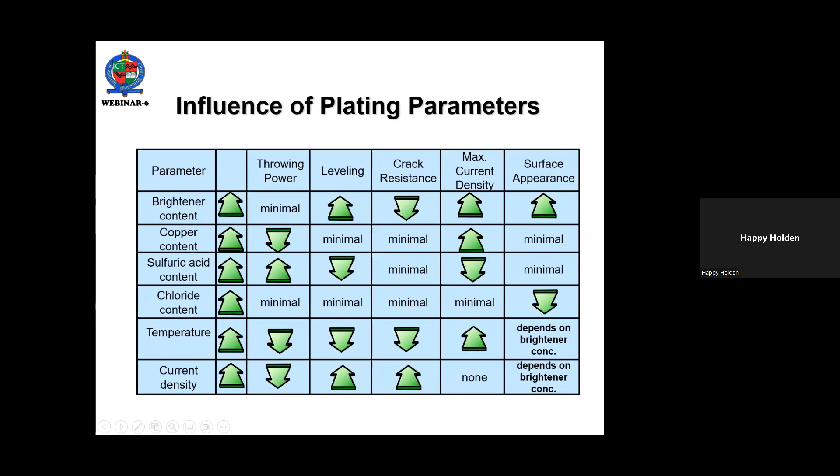When you get into electroplating, which has always been my focus as a chemical engineer, there are a lot of parameters that influence plating and techniques like that. So today we'll talk more about sensors and areas like that I spent a lot of time working on and developing. The impact of these various plating parameters you can see in terms of relative influence. The interesting thing there in terms of most influential, contact resistance is one that a lot of times maintenance and everyone doesn't pay attention to, but resistance can build up on your plating racks, things like that, and have enormous influence. So preventive and predictive maintenance that we talked about is a really important one.

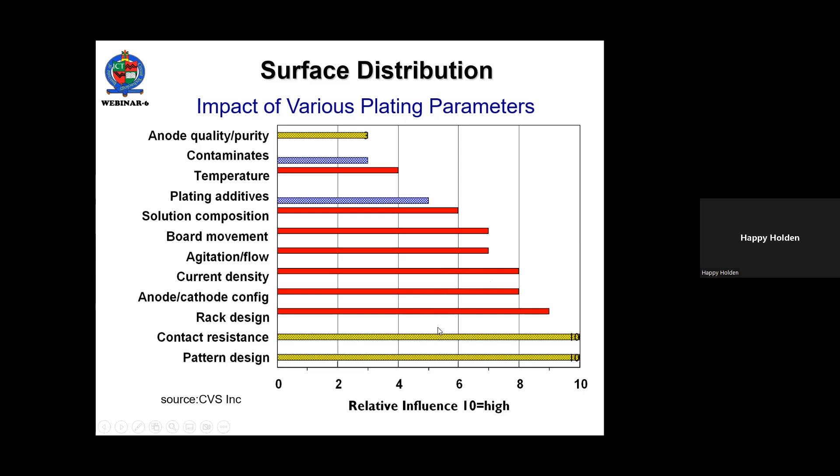But the last one, pattern design, is not one that you control. That's the artwork you're getting from your customers. And so that is one of the most important, and somehow a DFM program to help customers understand do's and don'ts of printed circuit design that'll affect plating parameters is really, really important.

Like I say, the digitization or the smart factory is basically one of sensing, connecting these sensors and data, and then predicting them to have an outcome improvement that you haven't had before. But the sensing is not just the sensing of data and activity, but it could also be interfacing to the automated machines that you purchased that are running their own loops, but you don't have access to some of the information they have. And so tying into smart equipment, again, is part of the programs we're talking about today.

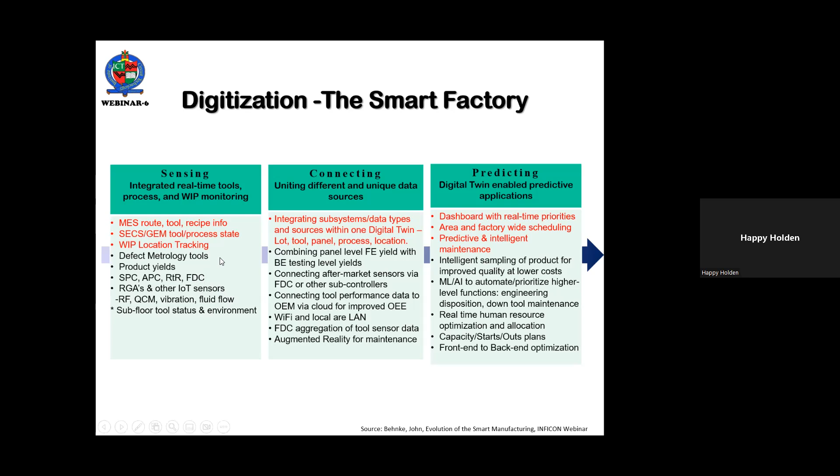The tin nickel is not tin and nickel. It's a unique alloy that's tin and nickel in a chloride bath, non-proprietary. We were only one of two in the entire world that used that. But if you look up the history, you'll find that tin nickel is far superior to nickel as a barrier plate. And over that, we would put our gold flash. So 1/10 of a micron of gold flash over tin nickel outperformed in Bell Lab studies 100 microinches of gold over sulfamate nickel.

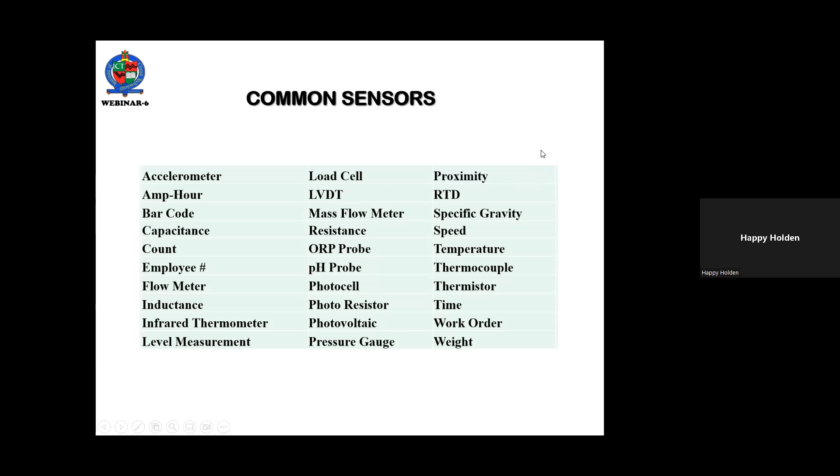The common sensors usable in printed circuit or assembly are listed here. There's probably far more, but ones like mass flow meters, specific gravity, temperature, pH probes, flow meters, inductance, time is an important one, ampere hours, weight, pressure gauge, level. These are all common sensors that potentially could improve and be part of your program.

One of the most important are these non-contact sensors that can read lot code. And these are some of the different ones you see here. Either the DMC code that may be on a carrier, or it could be a drill code that you put in after drilling, or a barcode that you put in as part of the imaging or part of the solder mask and legend type.

But anyway, we talked about the Wheeland facility that has nearly 120 of these readers to automatically direct the process flow because of all the different types of customers, different types of copper thicknesses, different materials, and different products that they build interchangeably within their system.

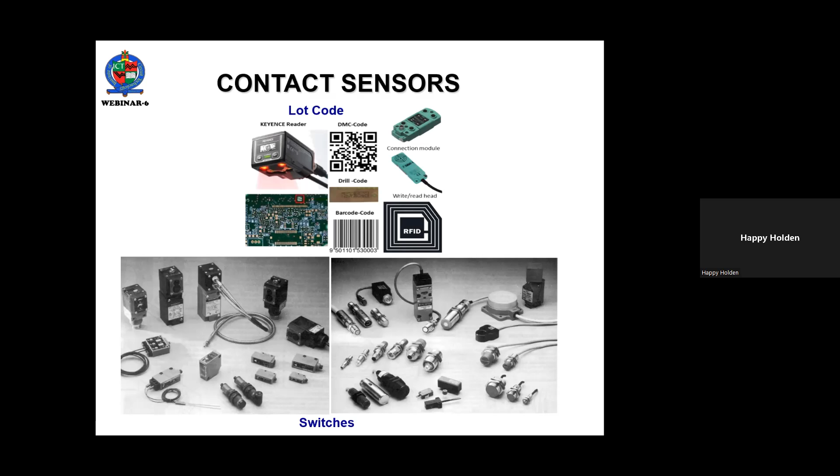Hopefully people will write talks about their etching system that can simultaneously handle 5-micron copper and up to 6-ounce copper on inner layer, outer layer etching in the same machine at the same time. And that's improvement in productivity and quality. You can always ask the question, how is that possible? Well, it is possible, being done 24/7 with the ability to move down to under 5-micron lines and spaces.

Ion selective electrodes are used throughout the world, and you can see from the list here that they cover a lot of elements that are used and are part of printed circuit or assembly and other cleaning processes with their range and techniques like that.

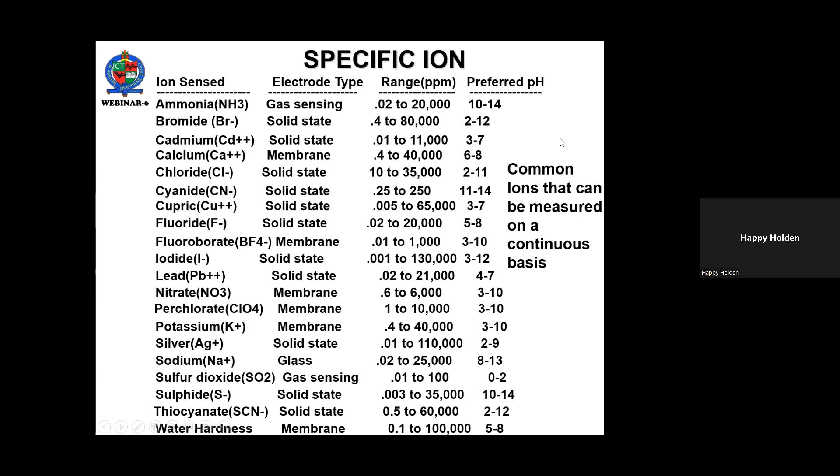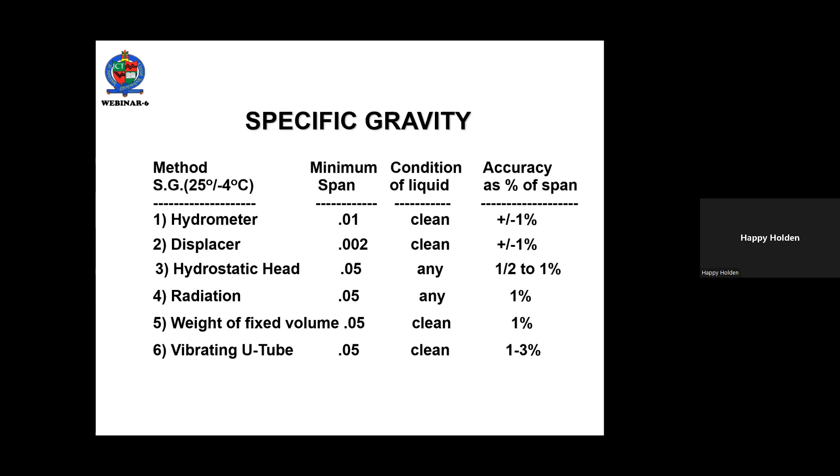My favorite one that is not used as much as it should be is specific gravity. You all have probably worked with the hydrometer, which is an inexpensive, easy to use glass hydrometer. You can buy these in different ranges and essentially drop them into any tank and read out the specific gravity. Another one, the displacer, is typically used in etchant control. Hydrostatic head is one that, rather than a set point, can read out continuously. There's radiation and weight of fixed volumes and the vibrating U-tube.

It's easy to do. Like I said, you just buy these hydrometers inexpensively, drop them into a sample. Any operator can do this. And in fact, this should be part of your specific process control, to have operators routinely measuring critical parameters and writing them down in the log. Now, as we talked about, that's not automated at all, but if it proved very useful, then consider installing an automated specific gravity.

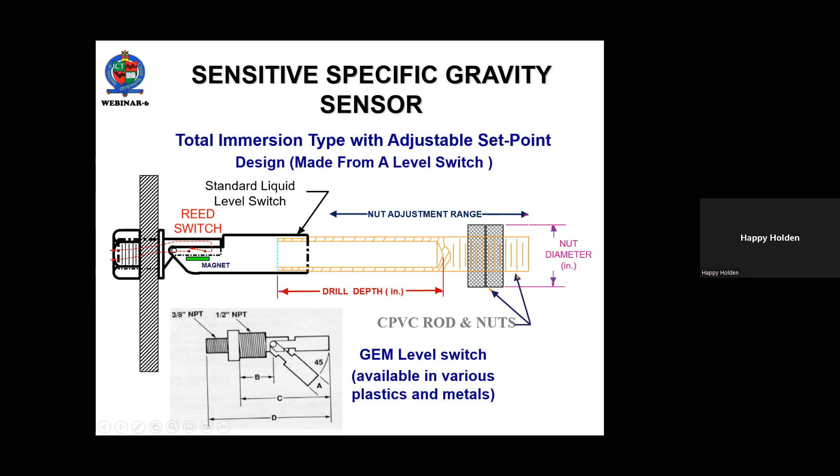Here's the calibration, and just pick your specific gravity operating point and pick your specific gravity span that you want. And this will then give you the drill depth and the nut diameter to go with that. This is part of a BASIC program I wrote back in the late 70s. So if you change anything, then you'll have to rewrite and change parts of the program.

This is a test for you chemical and mechanical engineers out there to explain how this displacement specifically works, because it's based on the principle of the center of gravity as opposed to the center of buoyancy. And that'll be interesting because the chemical engineers may be a little more cognizant of this than the mechanical engineers. I remember the fight we had because the mechanical engineers said this will never work, and yet it did work.

We finally explained to the mechanical engineers that the center of buoyancy when you're fully immersed is the center of displaced mass. So no matter where you put the nut, what's being displaced doesn't change, but when you screw that nut in and out, you change the center of gravity. And so with these opposing forces, the only thing that will make that thing close the switch is a change in the specific gravity of this displaced mass.

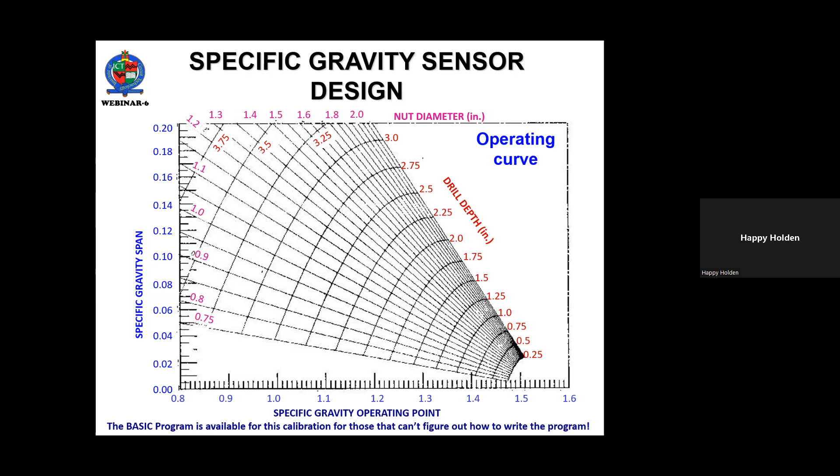If you want this to be a continuous readout of any specific gravity, then instead of having a fulcrum at the end, you put the fulcrum in the middle, seal the drilled out portion, and then buy a tilt sensor to do that. And as this device tilts, it will read out directly in the specific gravity. I'll let you do the rest of the work on that.

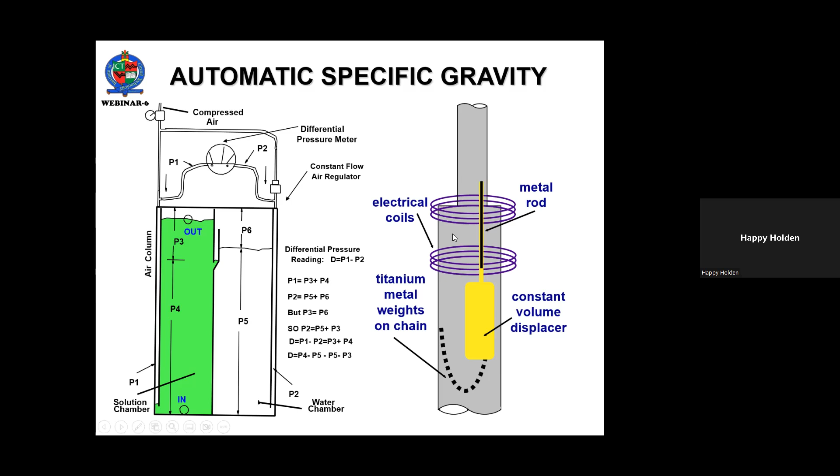Other ones available that we've built are differential pressure meters. As far as I know, you can't buy one of these, but this works very well if you want to go through the mathematics. One that works very well industrially is this titanium metal chain and a constant volume displacer and LVDT coils that then read out how high or low this thing floats, but it's expensive.

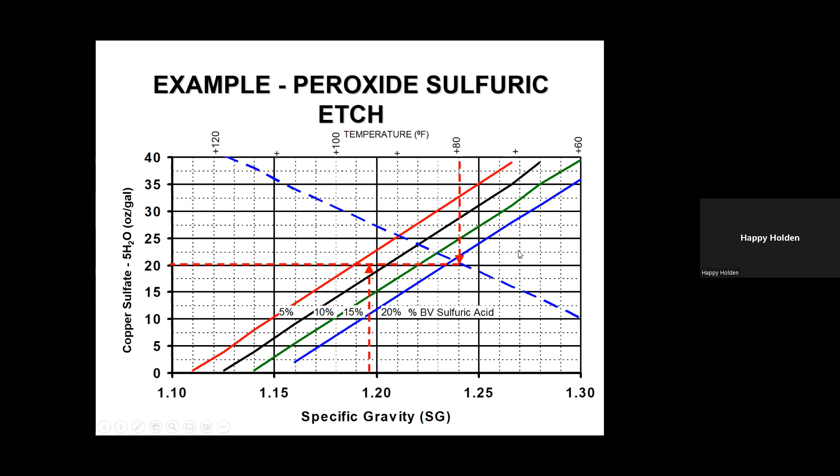An example of how specific gravity helps in the long run is this control of peroxide sulfuric etchants as a function of measuring the temperature, in red, and the specific gravity, and then using this calibration chart to figure out the copper sulfate and sulfuric acid levels without having to go to a titration and a chemical lab. So this can also be easily automated, as we talked about, and hooked into a simple data acquisition system.

Another very, very useful one, if you don't have it right now, is ampere hour meters. The ampere hour is simply measured by putting a 50 millivolt shunt into the DC supply. You can put these on every cathode bar, or you can put them on the entire tank. What you see here are ones that I built.

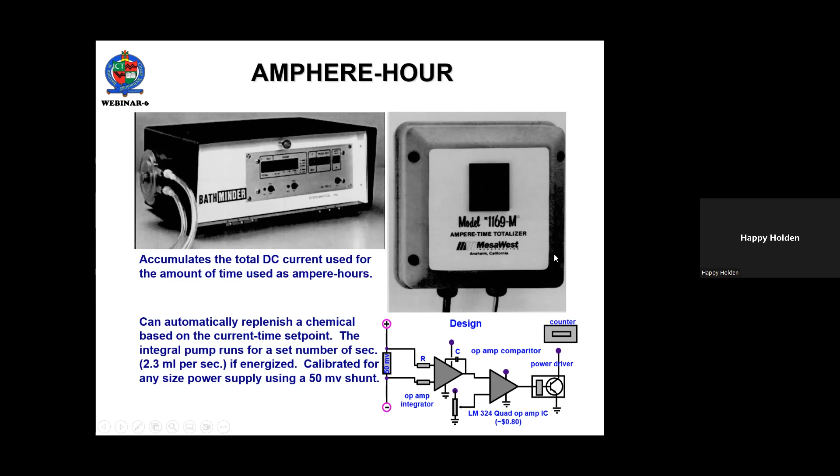These cost about 80 cents to $1 US to make, and use an op amp as a voltage to frequency converter, and then a counter, electronic or mechanical, that provides for addition of chemicals based on the ampere hours. The ampere hours correlate very well with concentration of chemicals, and so this provides continuous replenishment rather than large swings.

One that I like to start people out on is the technique we use to control the chlorine level of home pools. That's typically done by taking a sample of the pool water, putting a couple of drops of reagent into a bottle, shaking it up, and then comparing it with a color chart. Hopefully you're not colorblind. More sophisticated ones have a round wheel that you hold up and turn until you match the color perfectly, and it gives you concentrations.

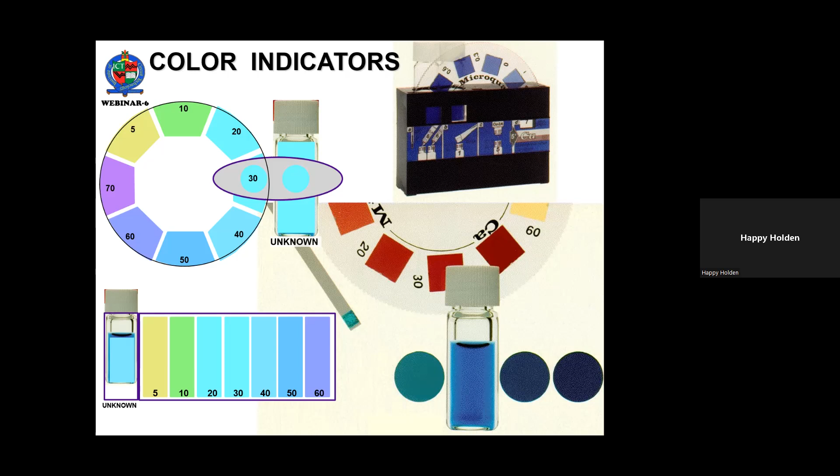Well, these have been developed for almost every type of electroplating and many other processes, as you see here. These different test strips or devices are inexpensive, easy to use, and easy to train operators on. Some of them have been automated in terms of interpreting the color. You can stick it into a reflection meter such as this that's sold, or you can use different types of spectrophotometers that you've seen here.

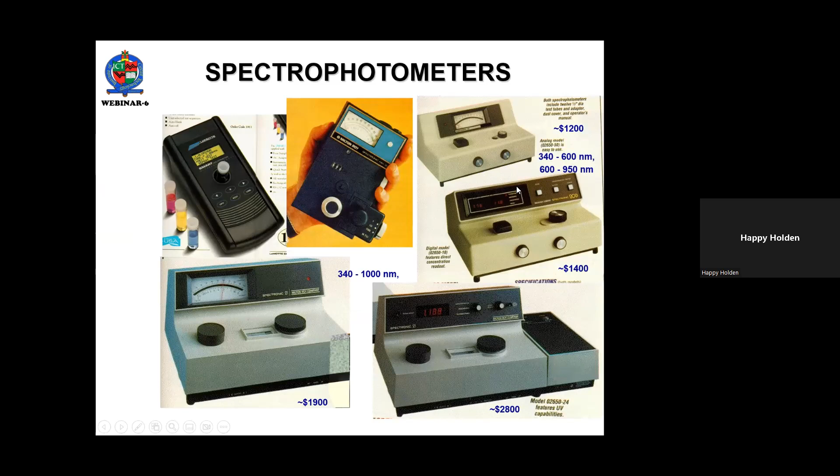Some of these spectrophotometers, like the Spectronic 20, go back to when I was in high school, but are still working and usable today. There are battery-powered ones, portable ones, et cetera. These are some of the newer ones that are automated with LCD readouts and graphs. I want to introduce one that Hewlett-Packard developed called the diode array spectrophotometer.

The diode array is different in that we use a stationary holographic grating. By having the grating, we disperse the incoming visible light from the sample and use a semiconductor diode array to scan for the amount of light, taking a millisecond. So instead of minutes for analysis, the analyses are done in milliseconds.

This is a machine I recommend you consider if chemical analysis or chemical sensors are part of your improvement program, because these spectrophotometers, taking the samples, will automatically create an equation based on concentration and give it back to you with the computer software built into the machine. So one of these in the laboratory will really help you.

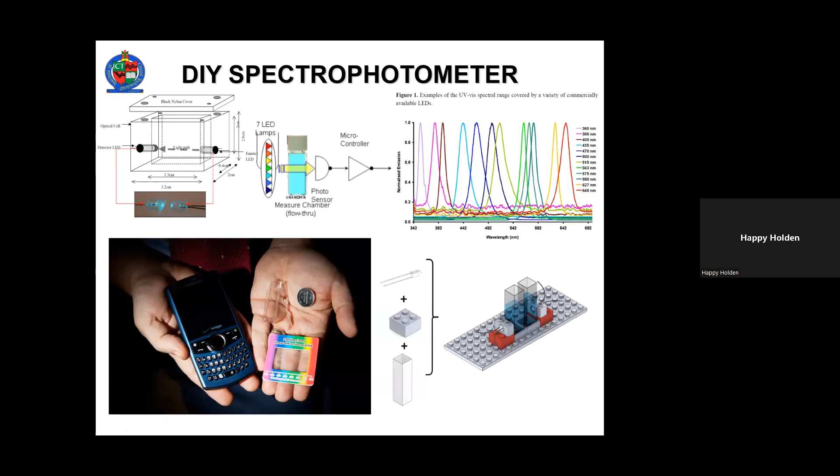Then you implement it with a do-it-yourself spectrophotometer, such as seen here. You can build these very simply. If you go to this URL, you'll learn about junior high and high schools around the world using the Lego spectrophotometer they built themselves, which you see in the lower right. There are different experiments on how to build and use it.

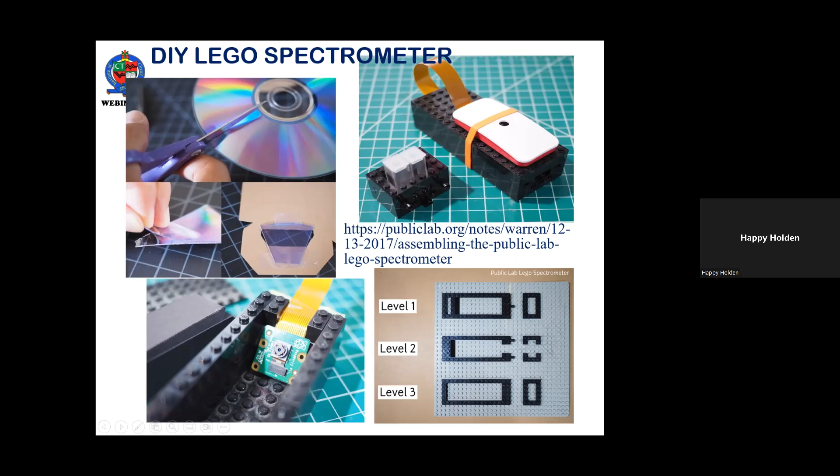You don't have to use expensive gratings. Any old CD can be cut up and used as a grating; that's why it's prismatic when you look at it. It diffracts light much as a ruled grating would, but you can buy a ruled grating for this. Once you figure out the specific wavelengths you're interested in for the process you use, instead of being part of the laboratory, you can delegate it to continuous monitoring by one of these Lego spectrometers you build yourself.

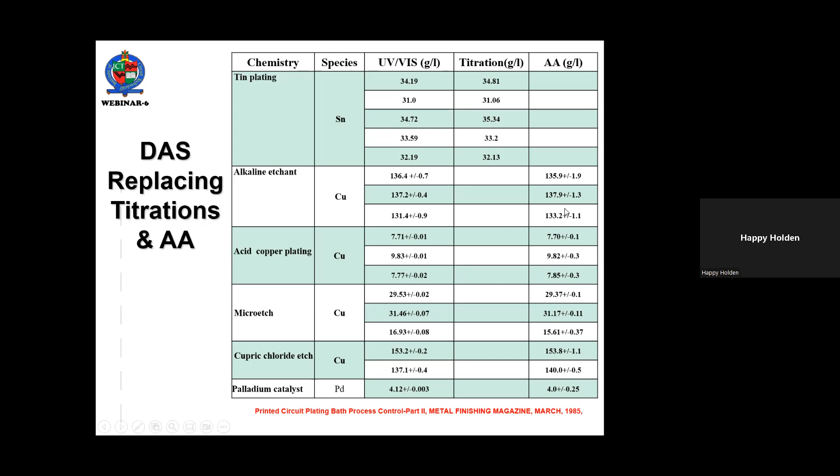To emphasize that, we had done a lot of work replacing our titrations and atomic absorption measurements with the diode array spectrometer. Here are comparisons of atomic absorption or titration versus colorimetric for tin plating, alkaline etchants, acid copper plating, micro etches, cupric chloride etches, and palladium catalyst. You can find this in Metal Finishing Magazine, March 1985, where we published all of this data.

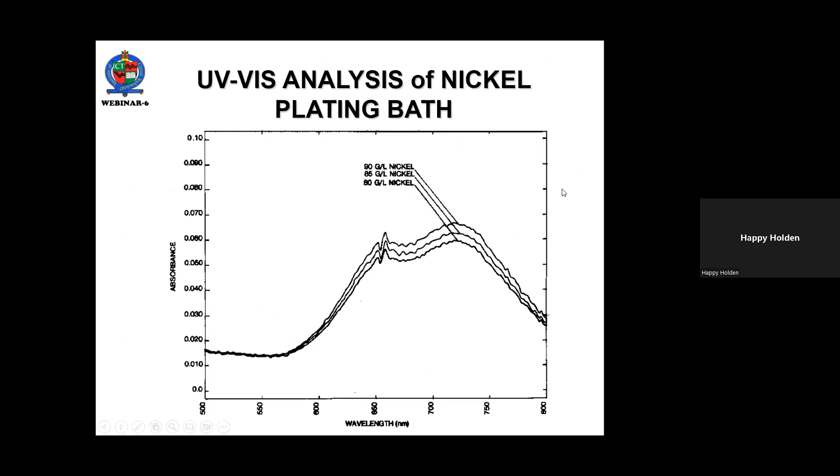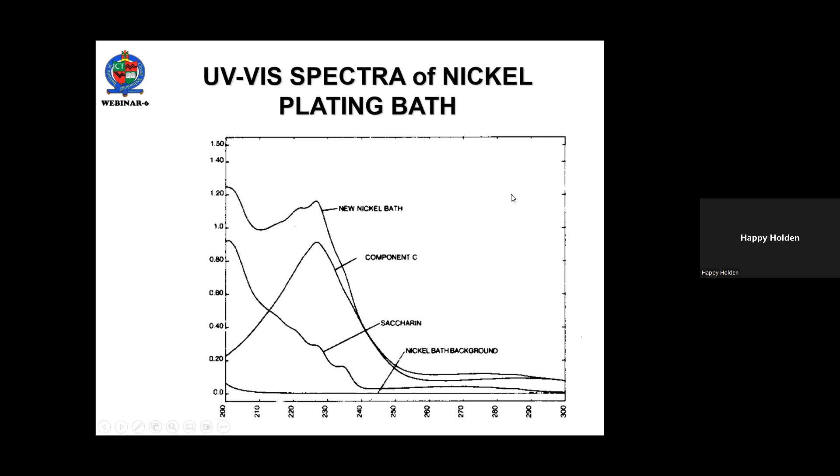Here are some of the wavelengths for our different nickel plating baths. You can see 80, 85, and 90 grams per liter at particular absorptions at particular wavelengths from the UV visible diode array. The same is true for the organic additives in the nickel bath, a new nickel bath component, the saccharin, and the background for the nickel bath.

The same is true for curves for palladium catalyst and/or gold in your operation, or it could be the wash water in final assembly, et cetera.

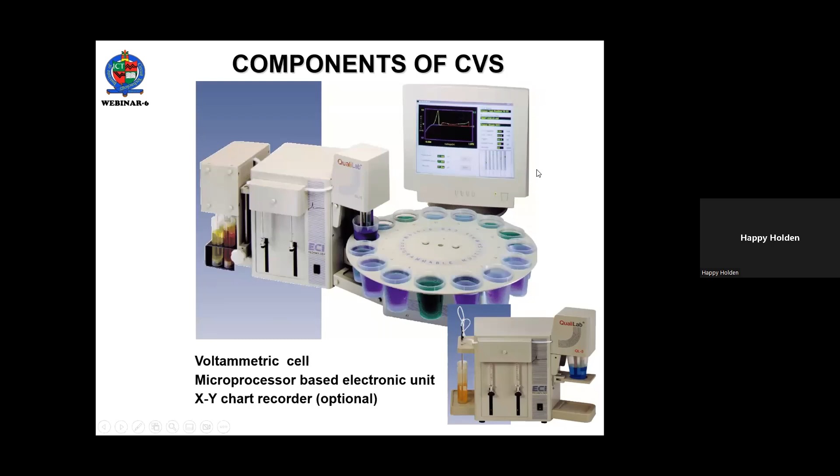A more complicated machine is a voltammetric or CVS analyzer that you can see right here, a couple of different ones that analyze electroplating baths. This is cyclic voltammetric stripping, CVS, developed by Tench and Ogden in the 70s while I was still a process engineer. I knew those gentlemen well down in Los Angeles.

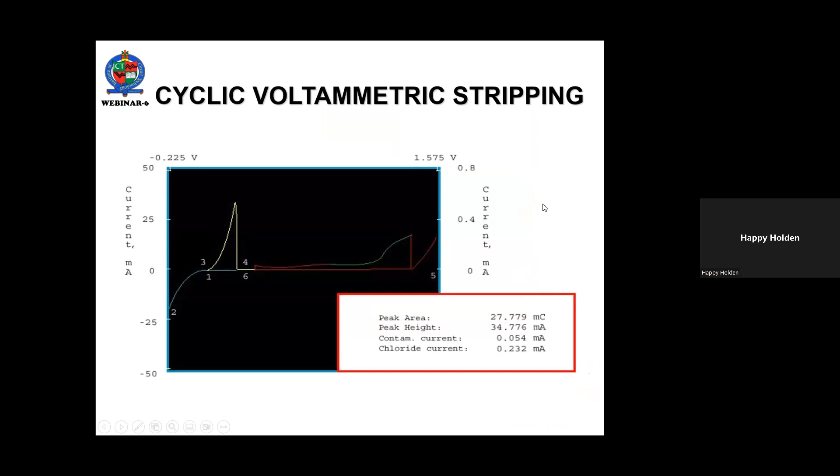My focus was to get a CVS on every single one of our plating baths, but at $20,000 or so for a laboratory unit, that's not practical. Fortunately, living in Asia, Asian universities have developed low-cost CVS for diabetes detection. What you see there is a $200 CVS copied from the universities that published the schematics and how to build these things. They're using it for diabetes detection, and we're using it for additives to copper plating or other types of plating.

Interestingly enough, the organic and aqueous additives they're detecting for diabetes are the same chemical compounds we're interested in, in terms of brighteners and levelers. That's one reason why it works so well. No one sells these $200 units, but you could track them down, and it may be something you want to build yourself, especially because you can make the printed circuit boards and assemble them yourself.

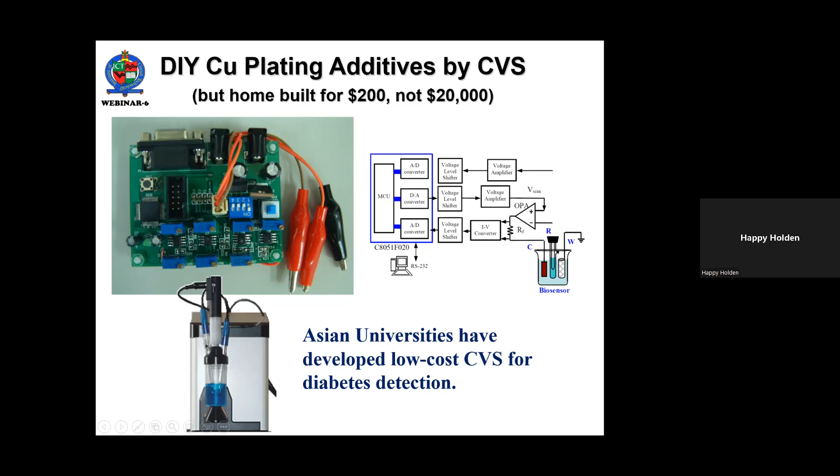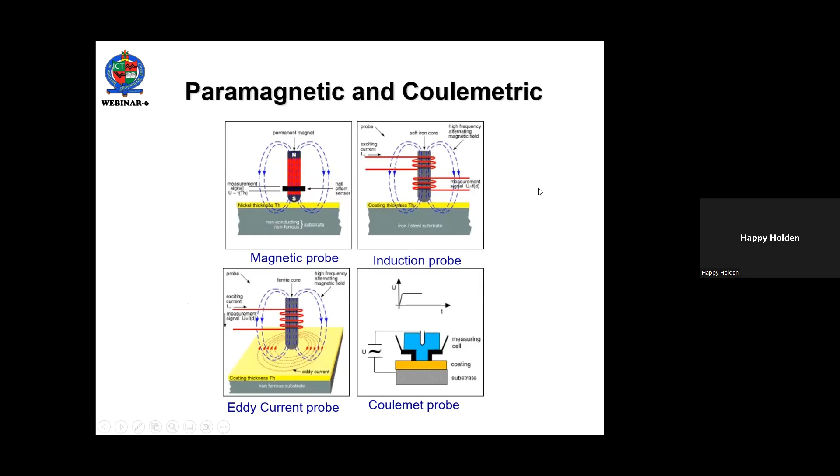There are other things: paramagnetic and coulometric probes, magnetic probes, induction probes, eddy current probes, coulometric probes that are available for the laboratory and can be automated, as well as X-ray fluorescence and beta backscatter for measuring your various coatings and thicknesses.

The big thing about going to more frequent analysis of concentration through a controller is that right now, as you run production without online controllers, your concentration is very up and down. Sometimes it dips below the minimum. That creates problems, but if you don't capture it right at that spot, you can't figure out why. You have 1 or 2% yield problems, but nothing catastrophic or large.

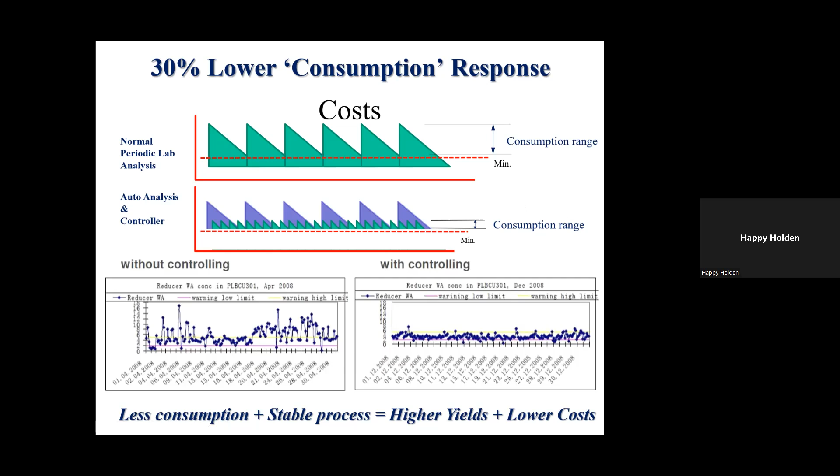A controller is much easier to build and run than an analyzer. An auto analyzer runs from 0 up to some concentration level and has to follow Beer's law, whereas a controller at a set point is only looking for a deviation from that set point. So a controller is much easier and cheaper to build than an analyzer in the analytical lab. As you reduce your concentration range, you also reduce your costs and improve quality. So without controller and with controller: higher yields and lower costs.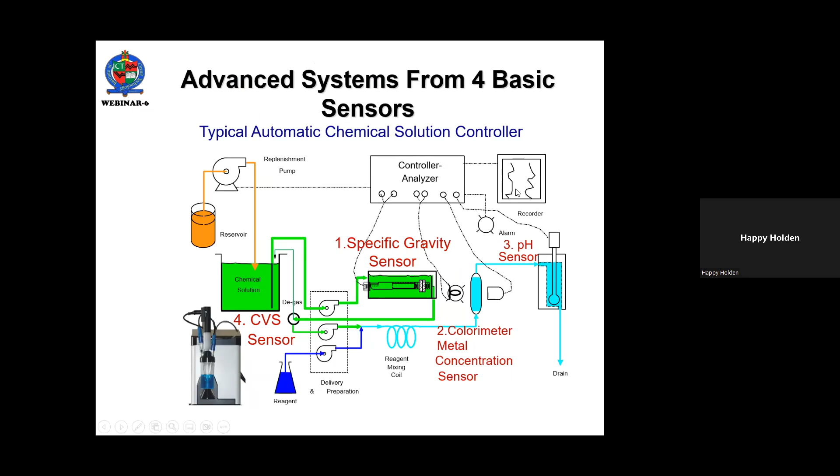Instead of manual titration, you may employ automatic chemical titrators, such as seen here. These are put together in a typical automatic chemical solution controller. It is typically built with a specific gravity sensor, 1, a colorimetric metal concentration sensor, 2, a pH or ORP sensor, 3, and may have a CVS sensor, 4. All these go into a controller and recorder that you can set up.

The most standard one for me goes back to the 1970s when I built my first electroless copper controller. It analyzes the copper colorimetrically, analyzes the OH radical using pH after hydrochloric acid is added, and then analyzes the formaldehyde after sodium sulfite is added. In the book you'll see pictures of these homemade electroless copper controllers. I was following the work of Photocircuits, which had fully additive electroless copper for additive circuits, and did a lot of the original work on this.

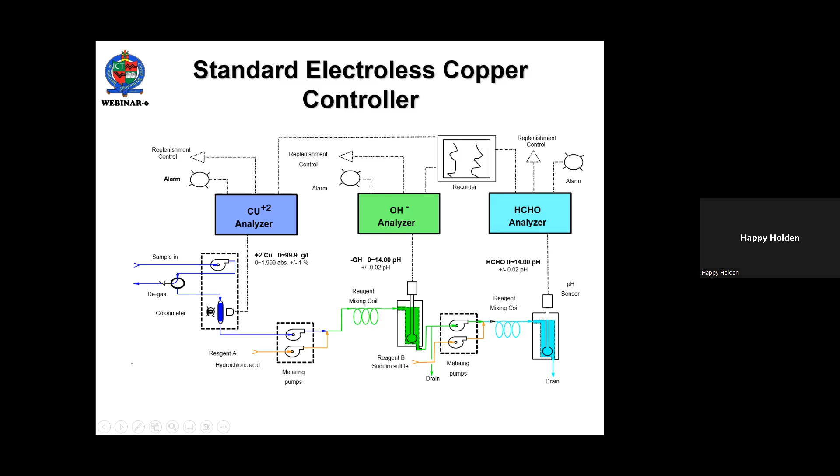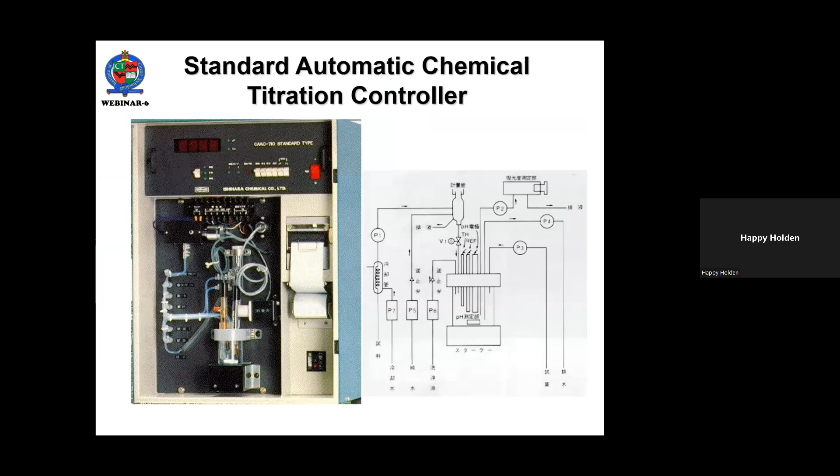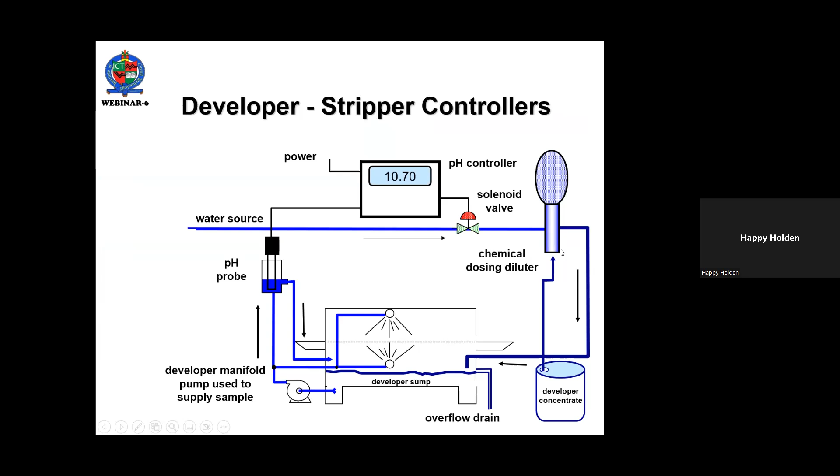Other ones that are sold by different companies, things like developers and strippers, which can be controlled by a simple pH shown here, or simply counting the number of panels and area processed using those sensors I talked about a few slides ago. How many square centimeters of work is actually going through this stripper and developer, and using that then to control the replenishment of strippers or developers.

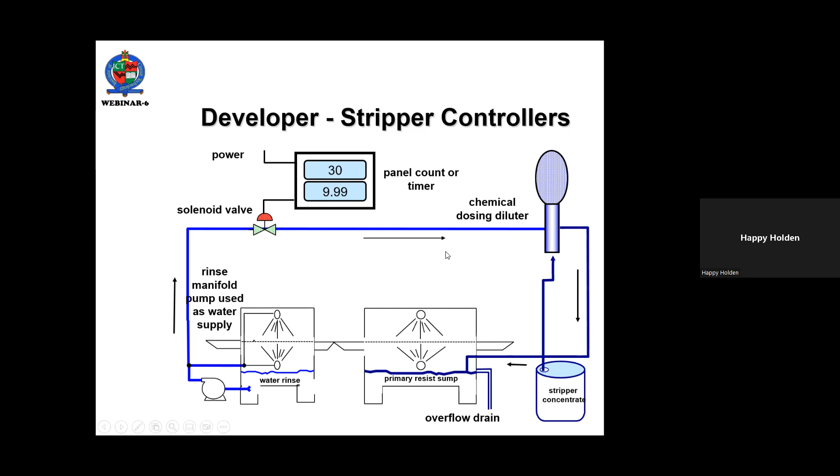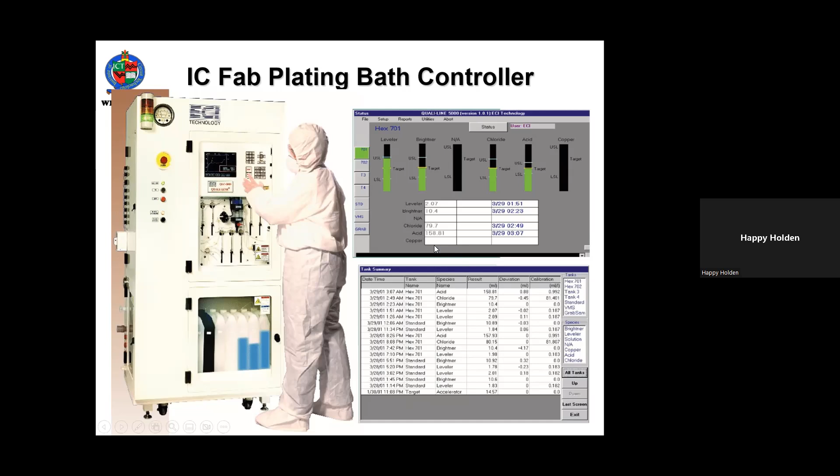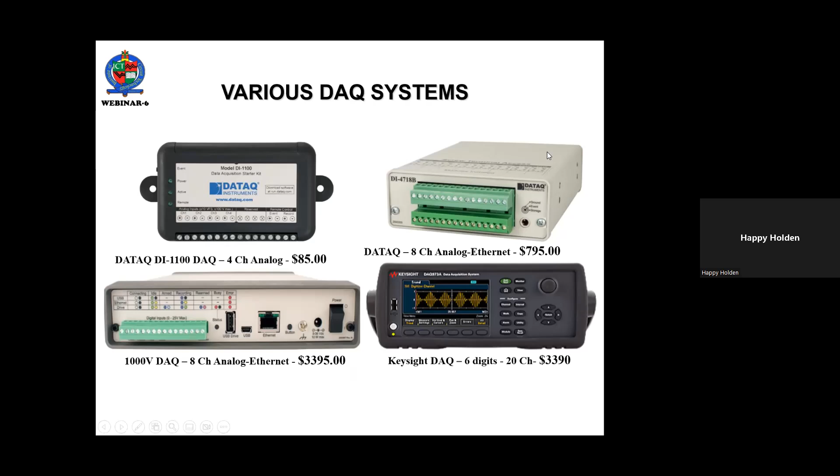So there are various data acquisition systems we've talked about. Like I said, this 4-channel analog one is $85. This 8-channel analog one with Ethernet, $800. So you can find anything between $50 and $3,000 available as data acquisition systems to tie together various sensors that you want to try out.

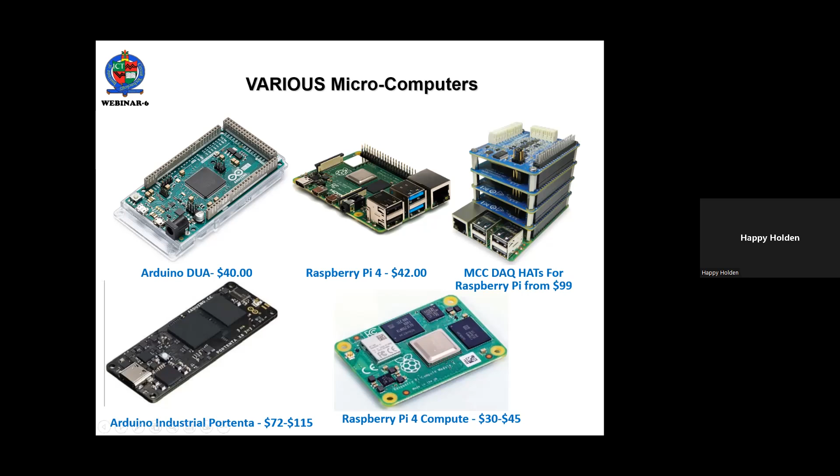And then for a computer, I prefer the Raspberry Pi 4 you see there in the middle. That's $42. I prefer that because it comes complete with Wi-Fi, Ethernet, and 2 different high resolution monitor outputs, and if you go to this MCC company, they produce data acquisition hats that for $99 just plug into the pins on your Raspberry Pi. And so now you have a complete data acquisition system, as many channels as you want. Or you could have the Arduino, which is $40, or the industrial Arduino, the Portenta, which is $72 to $115, or a simplified Raspberry Pi for compute, which is only $30. So these various microcomputers are available on the market.

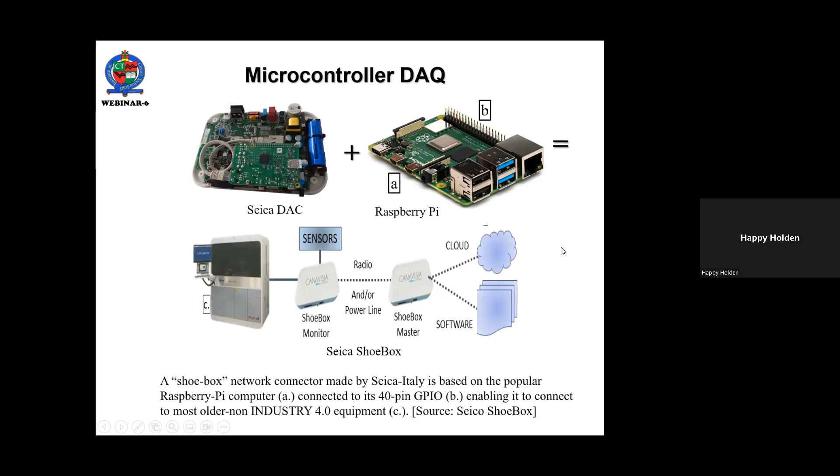And like I talked about last week, the Seica Corporation, Italy, has one for integrating assembly and facility sensors. This can be interfaced to IPC CFX, either by radio or power line, what they call the shoebox monitor. So you can look at that, but I'm advocating that you can buy your data acquisition system, buy your Raspberry Pi. And so I propose that you should consider, in one of your do-it-yourself process control projects,

designing and building the specific gravity sensor, interfacing that to one of the data acquisition units, interfacing that to a Raspberry Pi, and then writing your program in Python. Python is the preferred language on a Raspberry Pi because it's a Linux operating system, if you're not familiar with that. What you have then is a complete controller or diagnostic unit that can also talk to higher level software in your management information systems. You've got to start somewhere. Start with maybe one of the easiest to solve or one of the biggest opportunities.

Because if you can move on using sensors, then there are advanced sensors like these inline 3D confocal sensors. This is the latest from the integrated circuit world, in which these can be built over a conveyor and set up to measure individual line width very accurately, individual spacing, so that you can have a continuous readout from a conveyor of all the work going through your factory, provided they only sell the sensors.

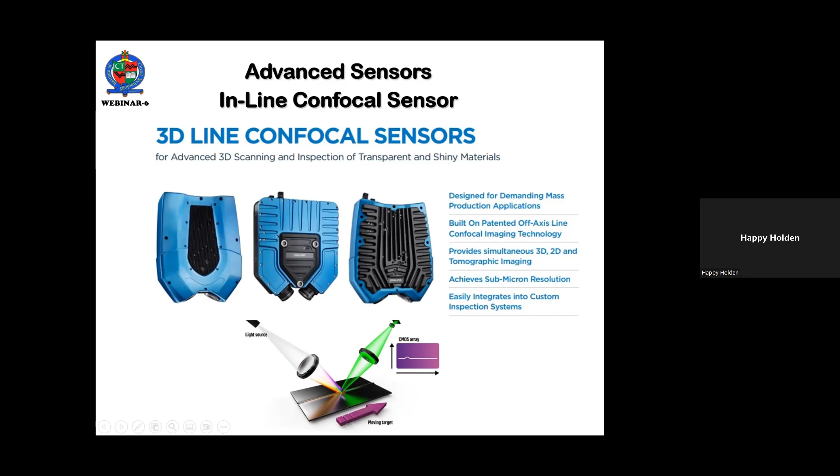But it's probably not the first project. This is one, once you've got the whole thing of Python programming, interfacing, working with maintenance or someone that can build the mechanics to support this, you can actually have an inline inspection system provide continuous readout with that.

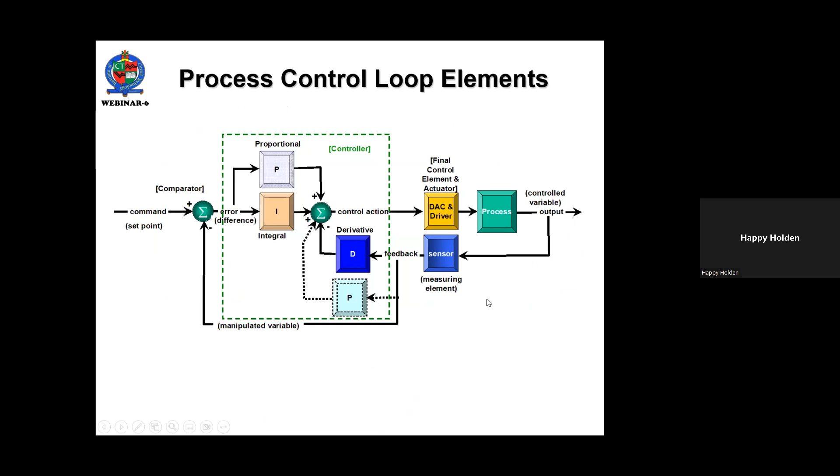And lastly, if you want to start to master process control, then you can start to look at what kind of control elements do I want to employ? Not just proportional on and off, but do I want integral and derivative control elements like that? But it's all going to depend on deployment prioritization.